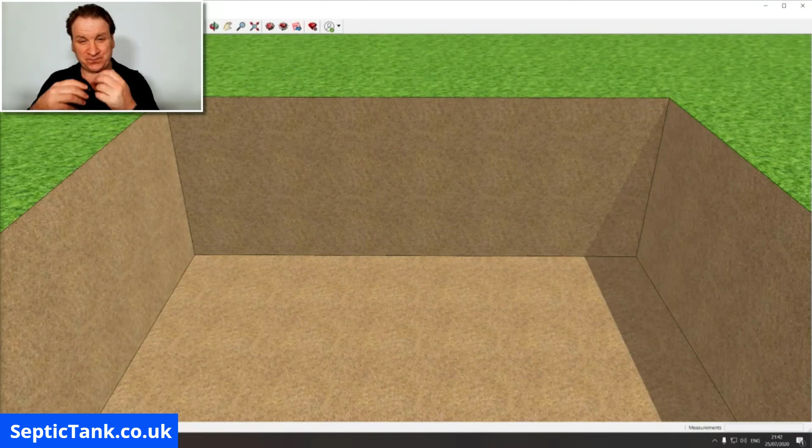Let me get straight into this for you. I'm going to show you a really step-by-step sequence of how to make your very own concrete septic tank. So let's get on with this. Alright, so we take it that you've got a digger on site and you've dug your hole - that's the first thing you need to do. Now, the size of the septic tank can vary, so I'm not going to get hung up on dimensions here, but I'm going to show you the principle and process of how you make a concrete septic tank.

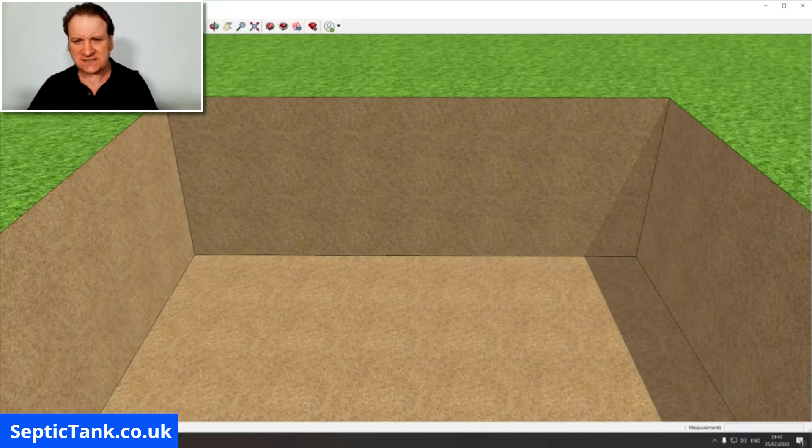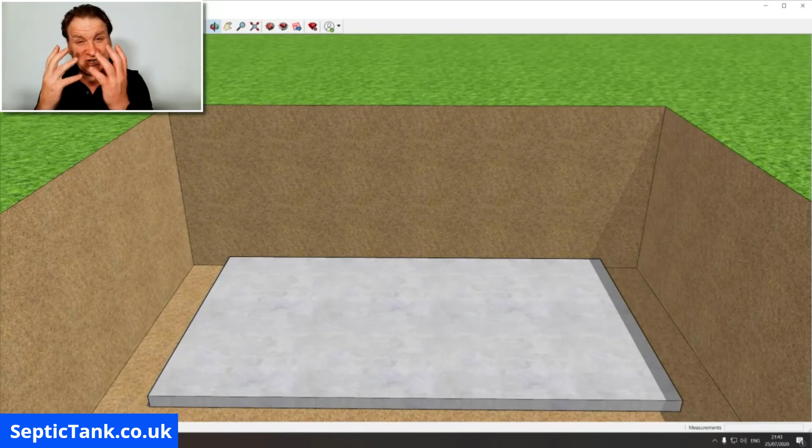The first thing that you need to do is put down the foundation. The foundation here is obviously made of concrete, and you can either buy them precast, pre-made, or you can get a cement mixer in and actually make your own base. Build yourself a foundation, with the size, length and width of the septic tank depending on what you want to connect to the property. The size of the septic tank will depend on the number of people or bedrooms you've got.

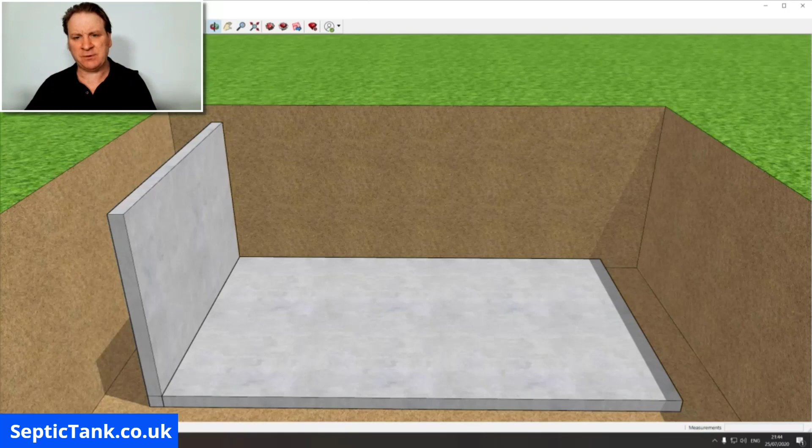Once you've done that, the next thing you do is put one of the sides up. It doesn't matter which side goes up first, but I'm just starting with the left hand side here. Now these can normally be bolted on, held in place, or concreted into a template, but on this example I'm just going to put them in like shuttering, and they can actually be bolted together. So once you've done side one, you put your second side on - that's the back plate done there. Once you've done that, just put the next side on.

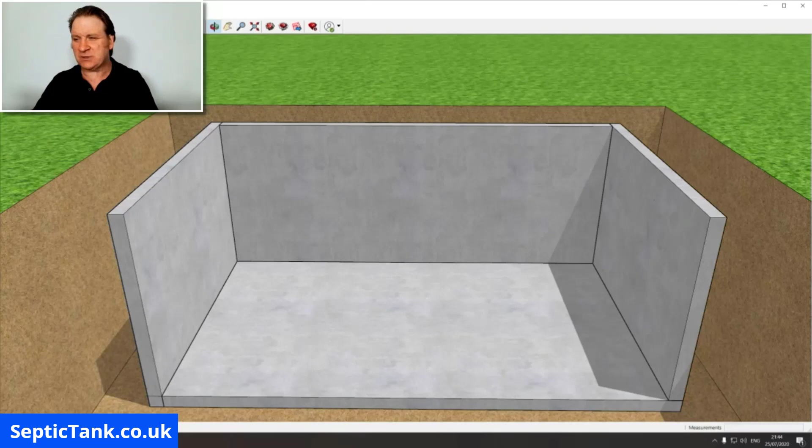Obviously the next side would go on here, that would be the next bit of the process, but I'm just going to keep the last panel removed so you can see how to construct the internal bits of the septic tank. So once you've done the four sides, or after you've done the first three, you can then start putting the internal baffle on.

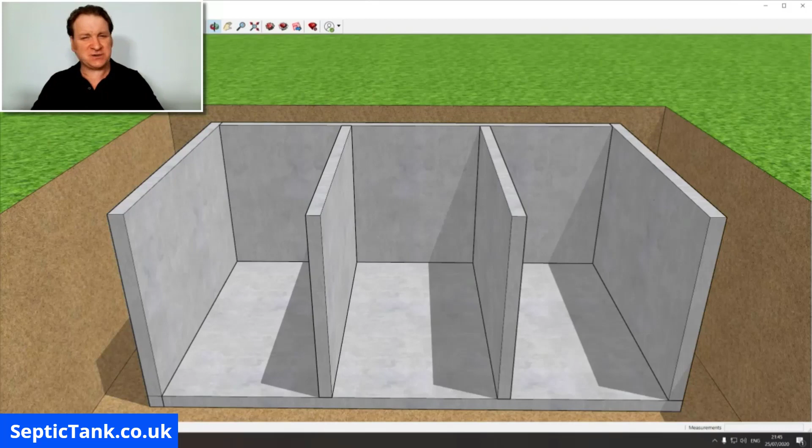The baffle basically - however many baffles you put in will depend on the number of compartments your septic tank has. So in this instance, as you can see, we've got compartment 1, compartment 2, and compartment 3. Now this is where it gets very clever. Why do you have 3 compartments? Well, it's all to do with filtration.

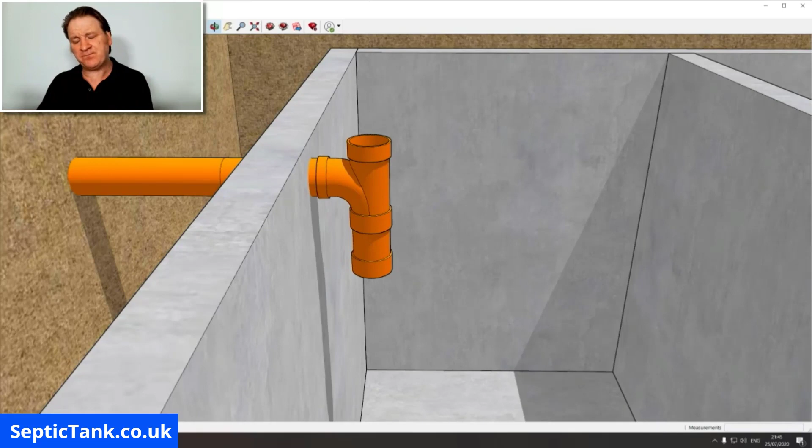Let me put this in. So the first pipe that comes in, this is your inlet pipe. If I can just zoom into that for you - all the wastewater will leave the property and come down this pipe. So that's the poo, the wee, the fat, the grease, the sludge, sanitary towels, and everything. And that will enter the first compartment here. Now the fat and the grease and the sludge will fall to the bottom, and the water level will then raise.

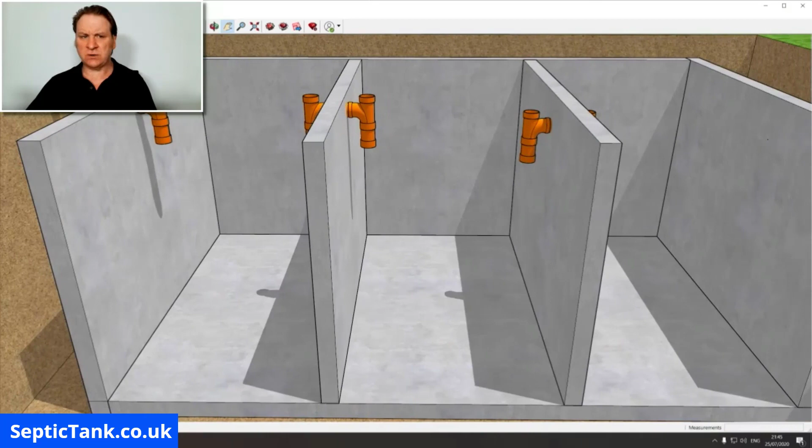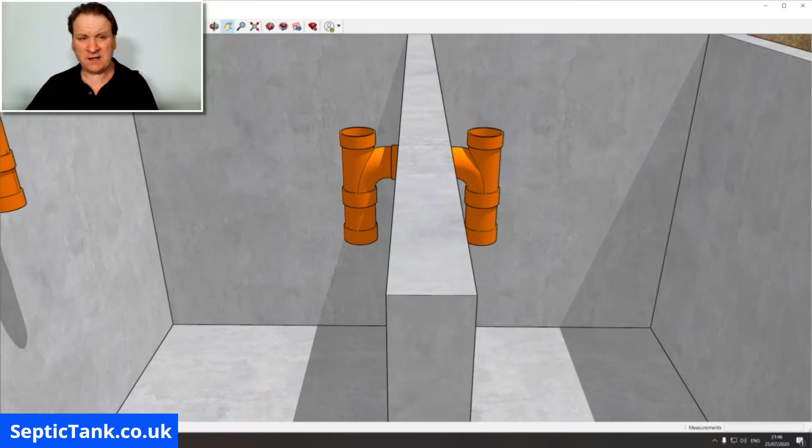From there, the next thing you've got to do is put your internal T-pieces in. So you've got your inlet pipe - let me walk you through this. The first pipe you've got is your inlet pipe there. The next pipe you would put in is a T-piece on either side of the first chamber, the first baffle plate. Then you'd put a T-piece on the second partition, and then on the outlet pipe, on the back plate of the wall, you'd put in your outlet pipe. So this is how it should look.

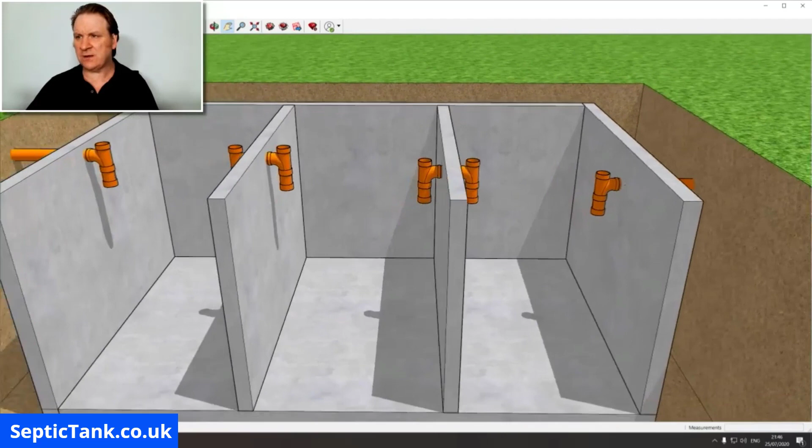Now what you'll see here, interestingly, is that the inlet pipe will obviously be the highest, because water obviously flows down to the lowest point - water won't go uphill. So each of these baffles is lower than the one before it. So let me just show you what it's like when I put the water in.

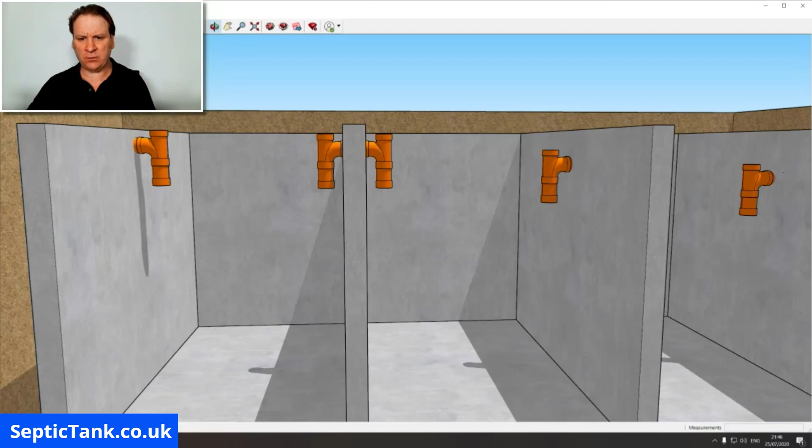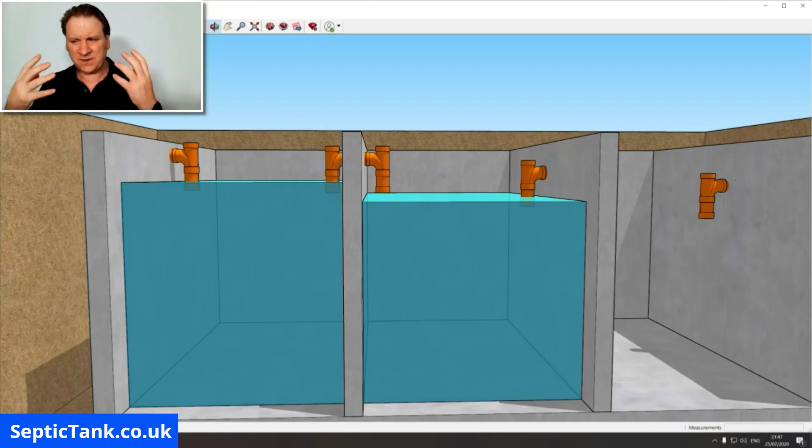When the first compartment fills up, that's typically what it will look like with the wastewater, and that's the typical height of it. Once the first compartment is full, the water drains into the second compartment, where the wastewater is a lot cleaner than the first. I know it looks clean in both these videos, but wastewater's brown and murky - I've just done this for illustrative purposes. Then on the third compartment, you've got the water level at the lowest point, but as you can see, the outlet pipe is a lot lower than the inlet pipe.

But the point is, that's how the septic tank works, and that's why you would configure the T-pieces in the way in which I've just told you to fit them.

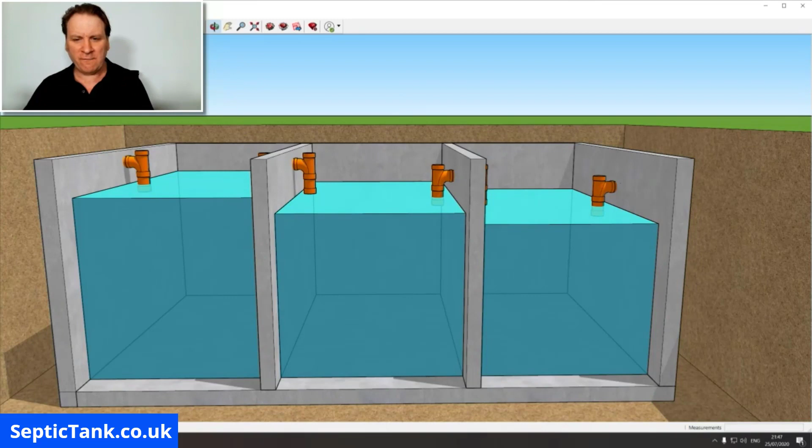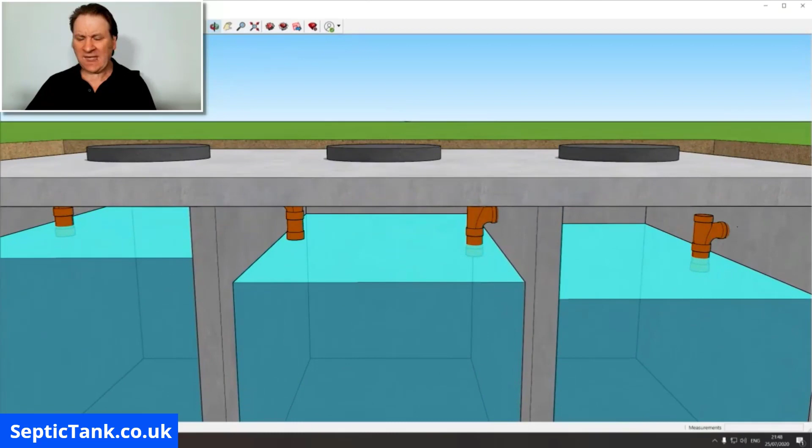So once you've done that, once you've created your inner partitions and connected all the pipe work, you would put the roof on, and it would look like that. On top of the roof you'll notice there are 3 manhole access points, one for each of the chambers. You'd put a concrete lid on each of those access points - they can be made of concrete or cast iron, regardless.

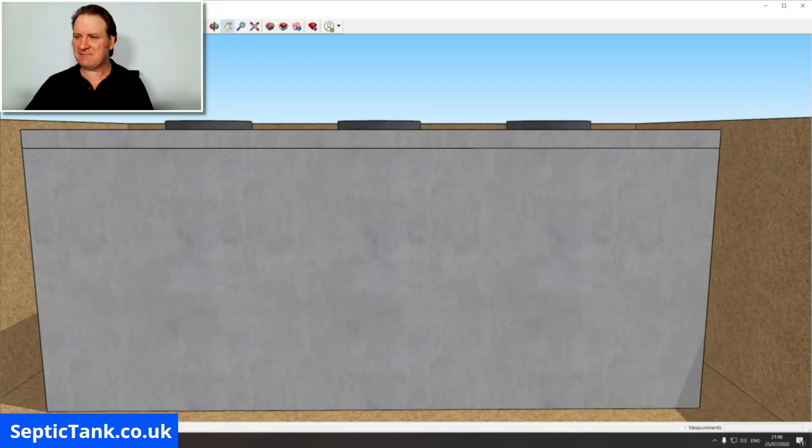So then they would go on the top, but the primary reason you'd put them on is for access, but they'd also be childproof, so people couldn't fall in there and drown. Once you've done that, the icing on the cake is the last side panel. So there you go - that's basically the principle of how to make your very own septic tank.

So just to recap, let me zoom into there. So that's your inlet pipe, and we go down here, that's your outlet pipe. And then obviously the outlet pipe itself would go to a soakaway somewhere.

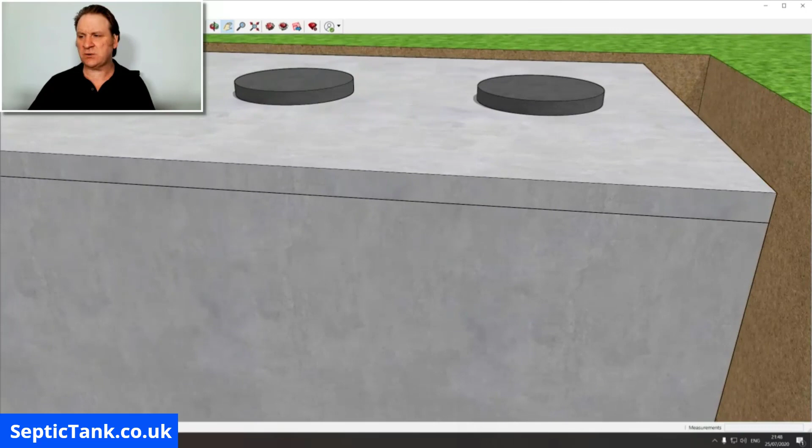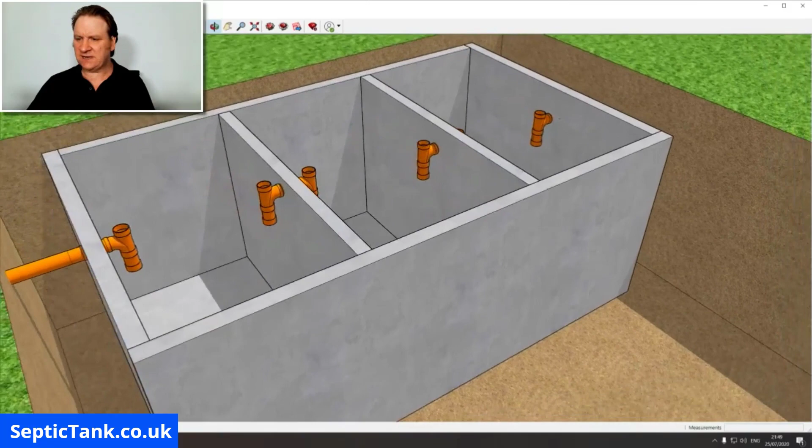So if I uncover that now, if I take the side panel off once more, there we go, and I'll take the roof off, I'll take the lids off, and let me take the water off as well. So that's basically - if I put the last side panel back on, there you go. That's an aerial view of the septic tank, how it would look once it's constructed.

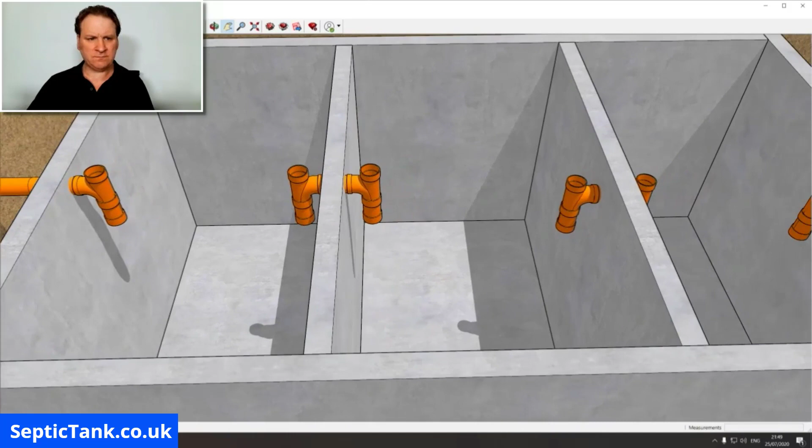As we said, we've got the inlet pipe, then the first baffle or partition wall with 2 T-pieces attached to it, the second baffle wall with the second lot of T-pieces on it, and then the outlet pipe, which has also got a T-piece on. As I said, the T-pieces stop the fat, grease and sludge going into your soakaway and blocking it up.

So there you go. I hope that video was helpful for you today.

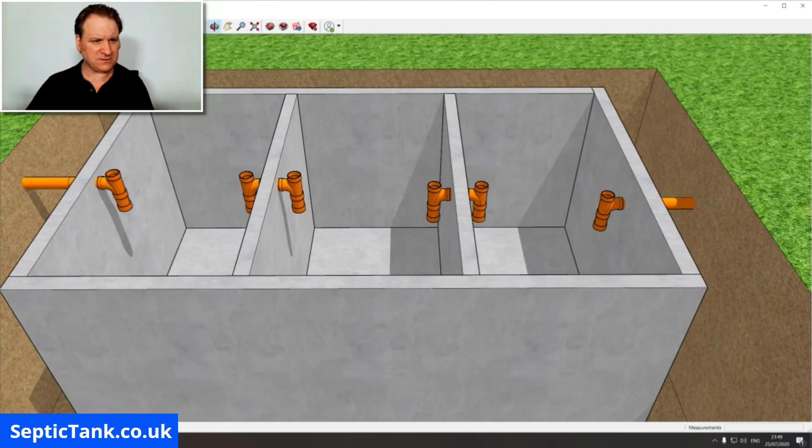So let me just get back onto here now. Bear with me a second. Let me turn that off and turn this off. Oops, hold on, it's all going Pete Tong. Is that off now? Okay, let's do this and turn that off. There you go, so I'm back. All right, so there you go.